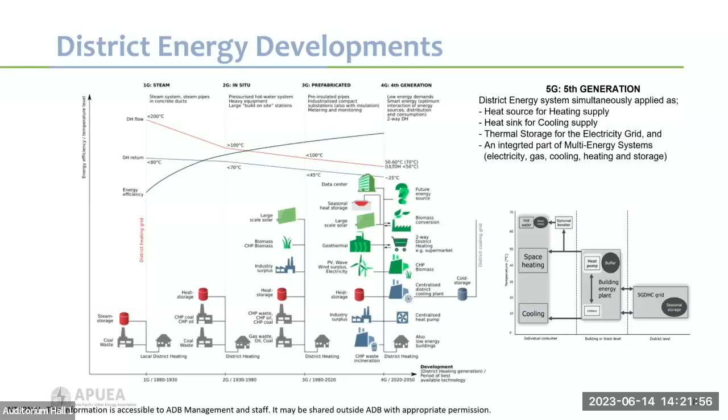We introduced geothermal. We introduced two-way district heating, or basically heat production from, let's say, supermarkets, that can actually sell excess heat to the district heating network. You can see there are many examples there. Also, when you connect district heating with district cooling, basically utilizing heat pumps, the hot and the cold side, for district heating and district cooling at the same time.

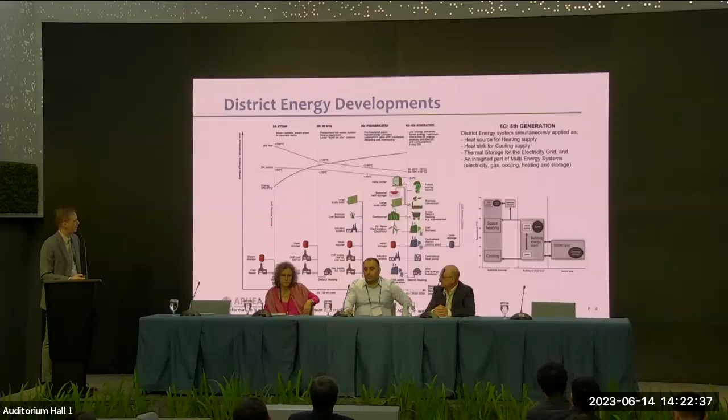So as you can see here, there's been quite a long development and lots of improvement over the years. And as you see in the graph here, the energy efficiency has greatly improved over the years. And also the temperatures for both the primary and secondary side have gone down, slowly and significantly. So that's a short introduction to where we are today.

And for district cooling, you might not be aware, but it has also existed for quite a long time. It started in North America in the 1960s. And in America, both district heating and cooling are utilized a lot in university campuses, hospitals, and these kinds of applications. There are more than 400 district cooling systems in North America.

In Europe, the first district cooling system was introduced in Paris in 1967, supplying cooling and heating to the La Défense commercial district. Today, there are about 150 district cooling systems in Europe. And the first district energy, both cooling and heating, system in Asia Pacific was at the Osaka Expo in Japan in 1970. And there are about 150 district energy systems in operation in Japan today.

And in China, I have an update to this number. I think in China there are actually more than 11,000 district heating systems and 200 district cooling systems today. In Southeast Asia, there are more than 40 district cooling systems in operation. I will show another slide, a bit more graphic.

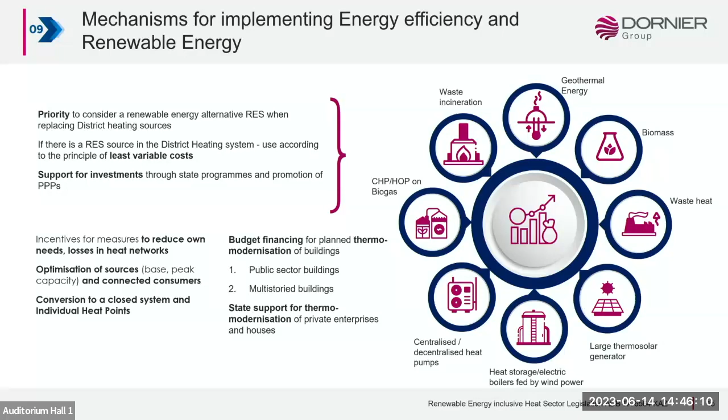And another topic, which I also mentioned already, is finding mechanisms for implementing energy efficiency and renewable energies. And one of the tools for doing that is that each of the regional authorities which got responsibility for heat planning has to do a heat master plan. They will be given 2 years' time to develop that heat master plan, and this master plan should cover at least a 5-year period, ideally a 10-year period, outlining the current status, the problems, how to go forward, what investments will be needed, for which measures these investments will be used, identifying sources of financing.

And so this is the responsibility of the local communities. They will give it to the ministry, and the ministry will give their comments: either they approve it or they give it back to the municipality again. They have to revise it until it is adopted, and then of course the tariffs also need to be approved as part of this master plan, and then it needs to be implemented.

And this is again one topic which was not initially considered in the project, but the ministry requested us to do a pilot master plan just to show the methodology, how to do it, and to give something at hand to the people on the ground, so that they have some guidance how to do it.

Yeah, and that's more or less the end of my presentation, so I could only shed light on a few subjects of this very complex project.

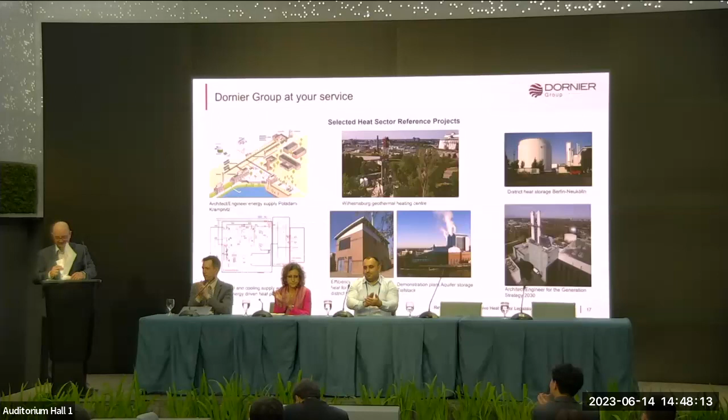Thank you very much, Ronald, for that quick introduction. We can really see the complexity. I mean, it is about the legal framework, the political context, the technical aspects, a quite complex project, which we probably could have a whole workshop just focusing around. Very interesting. Looking forward to the Q&A sessions here also.

Exactly. And you mentioned you already had it there in the project. So yeah, that's really great. It provides quite some thoughts on how to move forward. And I think it's safe to say that localization is quite important. I mean, all countries and markets will be quite different, but at least it gives a good indication on the approach to take anyway, and a lot of experiences to learn from. So thank you very much.

Next up, I would like to introduce Elmar Asgarzadeh, Tech Director of Climasel from Azerbaijan, who will talk about energy efficiency for the energy transition, reducing reliance on conventional cooling systems through innovative technologies. Please take the stand.

Good afternoon, ladies and gentlemen. My name is Elmar. I'm from Azerbaijan, and my background is chemical engineering. I'm new in the innovation sector. I'm a founder of Climasel, a startup company. We are right now changing the future of cooling systems with advanced materials.

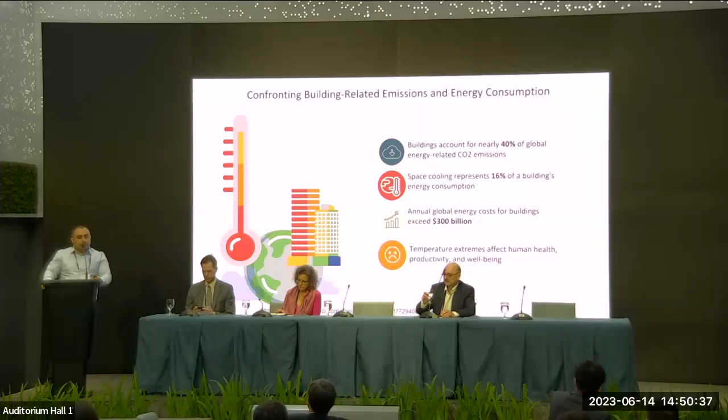In recent years, we have seen encouraging results; lots of investment has been directed towards the decarbonization of buildings. And also each year, lots of countries are joining this trend because they understand that efficient cooling of buildings is very important, and they understand the benefits.

But unfortunately, we have to face reality, because due to the Paris Agreement, we have to reach net zero by 2050. But for now, we are seeing an increasing gap between where we are and where we're supposed to be. That's why we have to solve this problem with hard work and also with efficient solutions.

The need for cooling has been increasing, and in the next years it will increase exponentially, because lots of buildings are being built and the population is increasing. That's why we have to balance this trend. There are lots of technologies in the world to combat the energy problem, I mean the cooling of buildings.

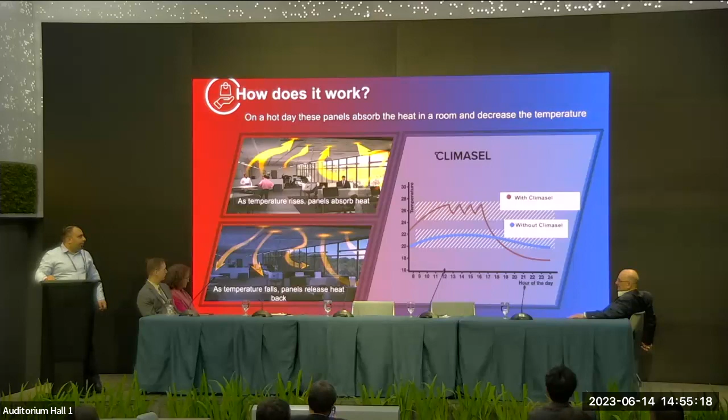Right now, incorporating phase change material into buildings is very popular, but there are lots of challenges. First, as I said, is leakage. The second is biodegradability, because lots of materials are not good for the environment, and also they are not as efficient as they say. But we have used bio-based phase change material, which is derived from different kinds of bio-based sources, and we use a biopolymer to incorporate it with our phase change material.

We use the desired temperature for buildings. The exact temperature changes with the location. For example, for Baku, Azerbaijan, we have designed a 23 degrees Celsius melting point because this is the comfort temperature. But for other places, especially hot climates, for example India, we have to design a higher temperature together with an active cooling system.

With the value proposition, you can ask whether this material should be very costly. Yes, its price is higher than conventional. Can we go back? Okay. The material cost is higher than conventional panels, but there are advantages. After using these panels for 2.5 years, you get payback from the reduced energy cost, and after that you get annual profit by using the panels.

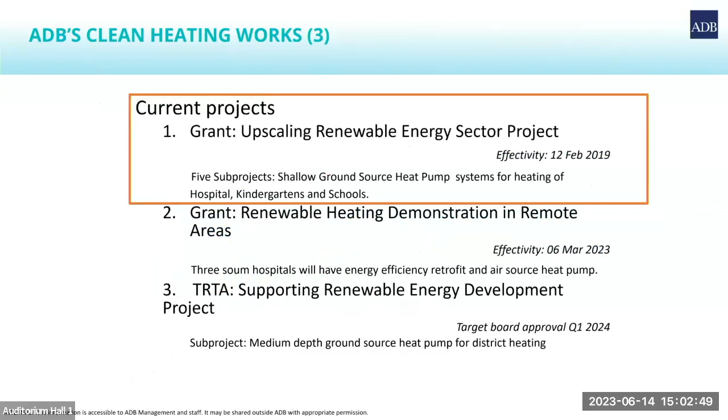So under these 3 projects, this slide aims to give a brief insight on what we are doing and what projects we are funding. In case of scale of focus, the projects are focusing on individual buildings as well as clusters of buildings or district heating. Currently implemented projects are on individual building sites, and we are trying to shift to district heating.

In terms of the technologies used, those 3 projects used shallow ground source heat pump, open and closed loop, and solar thermal collectors for heating and hot water, or injecting the excess energy into the ground during summer, aiming to support the shallow ground source heat pump during heating seasons.

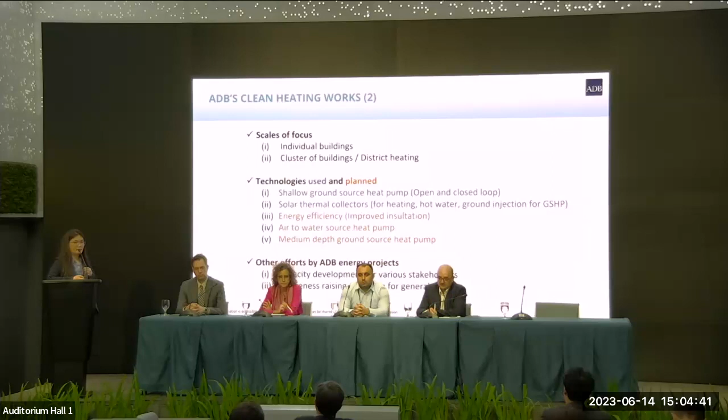The names of the 3 projects are listed here. The first one is the Upscale Renewable Energy Sector Project, under which we have almost 12 sub-projects. 5 of them are focused on clean heating, using shallow ground source heat pump combined with solar thermal. This project became effective in 2019, and aimed at providing clean heating for hospitals, kindergartens, and schools to maximize the benefit of the project.

The second one just became effective recently this year, with implementation starting in March. The name is Renewable Heating Demonstration in Remote Areas. Under this project, some hospitals will be energy efficiently retrofitted, and air source heat pump will be providing energy.

The third one is actually transaction technical assistance. The project name is Supporting Renewable Energy Development. The target approval for this project by board approval is next year Q1. Under this, we have a medium depth ground source heat pump sub-project for district heating.

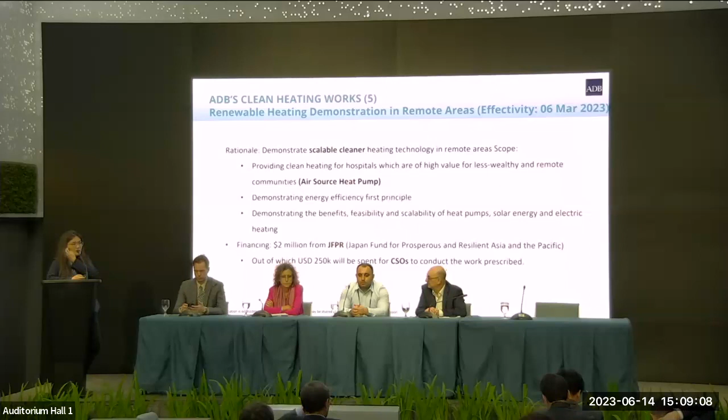Last but not least, this project, the Transaction Technical Assistance Project, is Supporting Renewable Energy Development. Under which, as I mentioned before, there is a sub-project for district heating of Kharkhorin city. The technology to be used is medium depth ground source heat pump. Differently than the shallow ground source heat pump, we have to drill up to 2 or 3 kilometers into the ground, so this technology is not site specific and can be implemented anywhere.

So it has great potential for replication or scaling up in the future. This project will be the first in Mongolia, if it successfully gets approval from the board and is implemented.

This table is showing the comparison between the medium depth ground source heat pump and shallow ground source heat pump in terms of cost implications. For shallow ground source heat pump, to have the equal capacity of system, we have to have like 440 wells drilled. But with the medium depth ground source heat pump, it's only 4 wells, so not so much land is needed. Drilling cost per meter is much higher for the medium depth one, but because the total drilling length is significantly less than the shallow ground source heat pump, we end up having much lower cost for drilling.

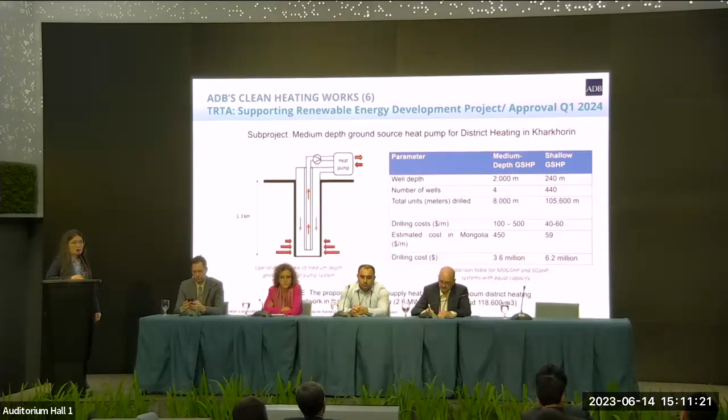So with this technology, we are trying to shift from focusing on individual building heatings to district heating. That's the end of my presentation. Thank you so much.

Thank you very much, Tuija. It's great to see the work that you're doing in Mongolia also, even though the conditions are similar to Kazakhstan, but also there are quite some differences. It's great to see that you're developing district heating solutions also in the remote areas, which I know is meant to be replicated. It's really great to see that you have found the technologies that are feasible to be replicated.

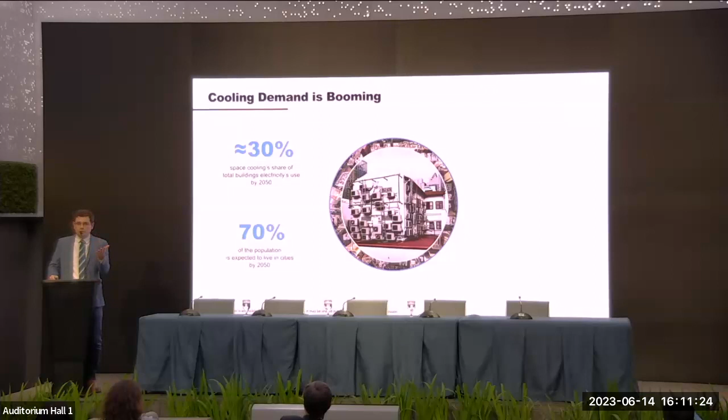70% of the population is expected to live in cities by 2050. Today we are around 55% of people living in urban areas. So by 2050, there will be about 2 billion more people living in urban areas where district heating and cooling makes sense, so there are real opportunities coming for these technologies.

The energy requirements for cooling demand will grow by 300% by 2050. The baseline is not today, it's more like 2016-2017, but still the jump is huge, and this is global. For the Asian region and Latin America, we are expecting for the same cooling demand a jump of 625%. So we are talking about a topic that has to be properly managed in the coming years and decades if we don't want its impact on sustainability and climate change to follow the same trend.

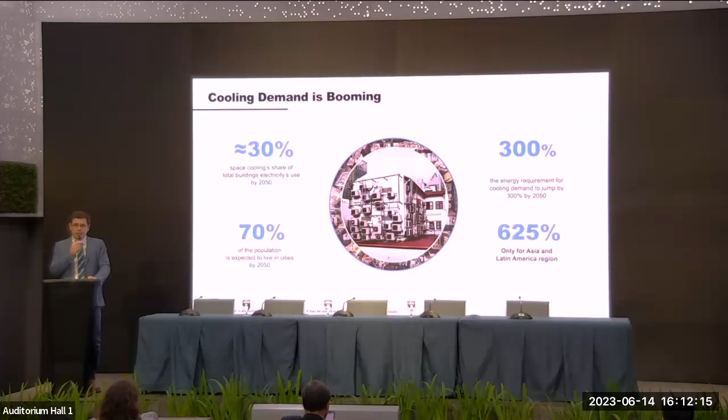So why district cooling? The common benefits of district cooling, I'm sure you are aware of those, but I found these numbers always impressive, so I like to show them.

We could expect 50% improvement on energy efficiency versus standalone. I'm not saying every project is the same, but I had to choose one number, so kind of an average. We can also expect 50% reduction on carbon emissions, 80% reduction on chemicals, and actually 65% less water consumption versus standalone. For these last two, it's really related to lower use of water and chemicals, as we move more and more into non-chemical type of water treatment. Those are common benefits from district cooling.

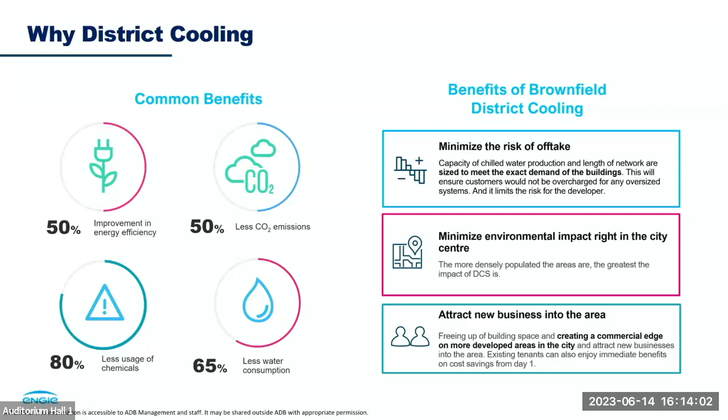Now I want to discuss a bit about the benefit of brownfield district cooling, which we don't talk about a lot. This is basically development of district cooling in a brownfield area, where you already have existing buildings. We often think about district cooling and heating for new real estate and industrial developments, but actually the real opportunity, at least in the short term, is on existing buildings. If we compare the portfolio of existing area versus the coming new area in the next 10 years, there's much more existing area where we can have an impact by implementing these kinds of technologies.

So some benefits of developing these technologies in brownfield areas: we minimize the risk of offtake, which is very important for both parties, the clients and the developer. We size the system properly, so we don't overestimate the cost for the client. And on our side, we limit the risk of future real estate development that isn't always under control, especially when you have a crisis like we just experienced a couple of years ago.

Another benefit of brownfield district cooling is the environmental impact, because existing areas are generally densely populated and in the center of cities. New developments may also be in city centers, but in general they tend to be a bit more spread out. So focusing on existing areas, we would usually focus on city centers where there are a lot of people, and the denser the area is, the greater the impact district cooling has.

Similarly, having district cooling and district heating developed in existing areas will bring a new sustainability impact to that area, which can attract businesses, especially tenants now looking for offices. Some of them are really looking at the sustainability impact of their business, including the offices they are in, and would consider an office that is more environmentally friendly than others.

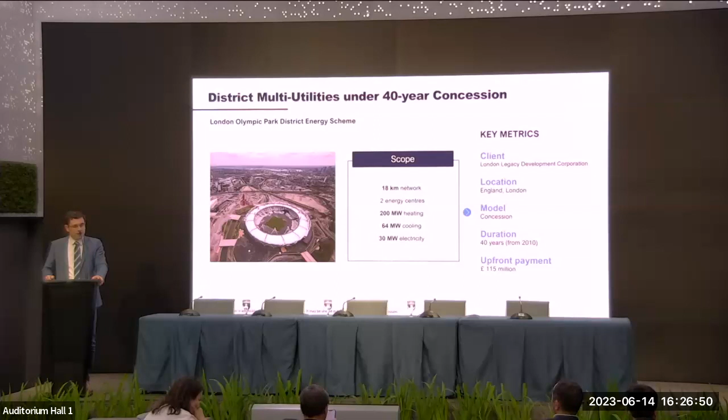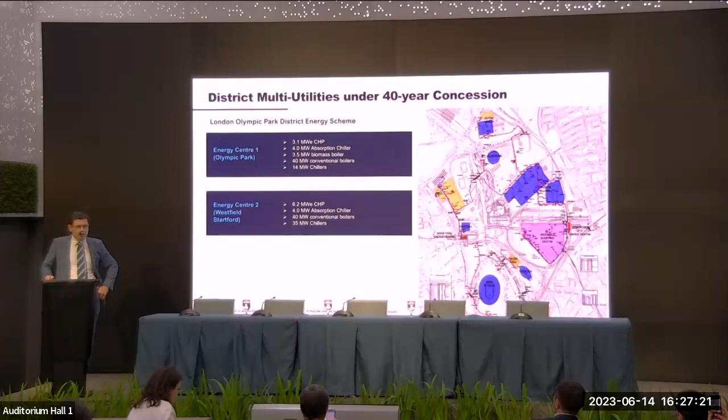Two energy centers that are using interesting technology that we would not really be able to use in real estate development in Asia, but for sure for industrial estates, it could make sense at least in Southeast Asia. So absorption chillers, some biomass boiler, conventional boilers and chillers. And then there is the distribution part of 16 kilometers that is connecting all the buildings.

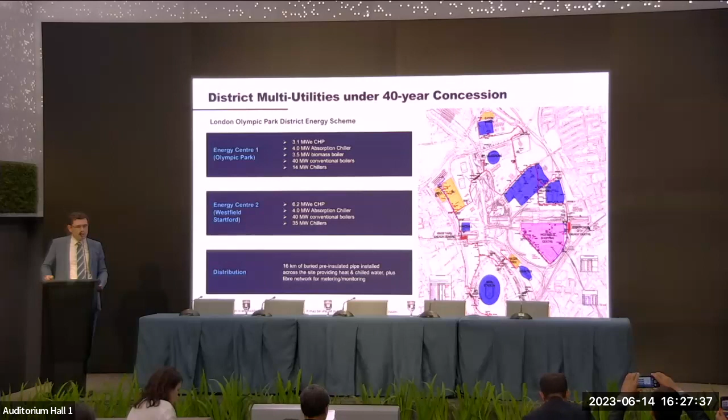And last but not least, I finish by this one. Usually we keep the best for the last. So this is a 50-year concession that we secured a couple of years ago in 2017. But it's still a key reference for ENGIE. So in my mind, I feel that it's only a couple of years ago. So we have acquired the existing energy system, utility system of Ohio State University, which is supplying energy to 485 buildings. It's one of the biggest universities in the States.

With a key target to reduce the energy consumption by 25% after 10 years of development, so by 2028. The upfront payment for this acquisition and some investment to meet our target is around 1.2 billion US in a partnership between ENGIE and Axium.

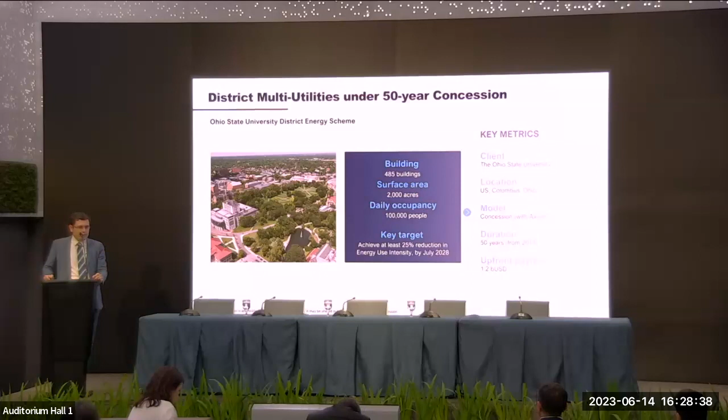And the beauty of this kind of partnership with universities is that we are in an environment a bit like Punggol Digital District in Singapore, where there is a lot of brain, there is a lot of innovation, there is a lot of research. So we created a center of expertise there, and it's really, from what I heard, because I've never been there, a real success story between the professor, teachers, and ENGIE as the operator.

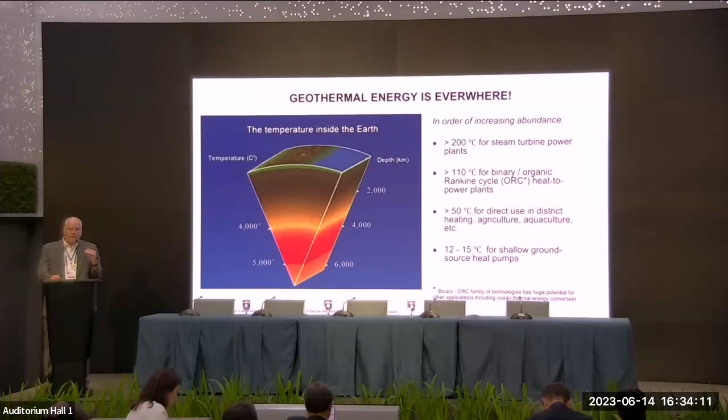Okay, but geothermal is everywhere, right? We have to remember that we still have lower grade resources that can be utilized, but we're not going to build a project around a power purchase agreement for most of that resource. So it's counterintuitive maybe, but as you go down the list there, the lower the temperature, the bigger the resource. And I think that'll be clear here pretty quick.

Okay, so one of the things that we looked at and talked about in Kazakhstan a couple years ago was this idea of how to develop geothermal energy. Well, we're not going to do steam turbines. We don't have that high temperature resource, but in the oil and gas fields, we know some of the oil and gas fields are pretty hot. So like bottom hole temperatures of 100, 120 degrees centigrade.

Now we can convert that heat into electricity using binary generation technology, organic Rankine cycle kit, and I'll explain that in a second. And then depending on our location, we were looking at Aktau or Atyrau. I can't remember which place, but the city, the urban area is almost on top of the oil and gas production. So conceivably we can do power generation at this 110 degrees centigrade range, and then we can take the residual from the ORCs and use that for district heating.

And then we still have heat energy to use for other space heating, which we could use for greenhouse agriculture and fish farming. Now, then the lower temperature, the 12 to 15 degrees C, that would be separate. Okay, but we could get 3 revenue streams in a cascade if we have the end uses co-located or located close enough together. So I think it's very important to think about this just in general.

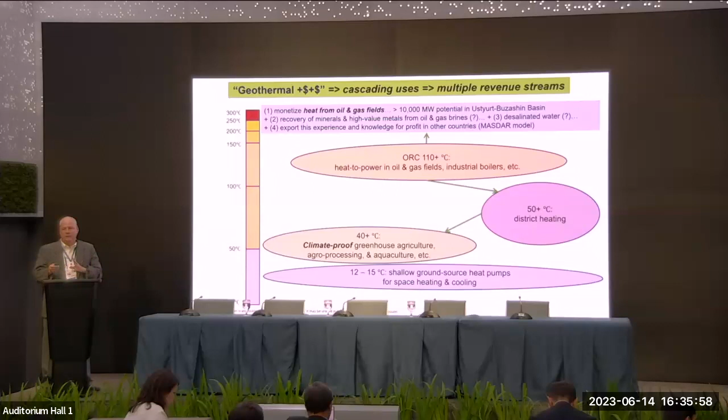We combine different types of renewables. We take one resource, geothermal resource, we can use it for more than one thing, but we really have to think about it. We have to want to do that.

So quickly on ORC, this is a binary closed loop system where you've got a turbine generator that has a working fluid with a boiling point lower than the boiling point of water. And these are designed really to mate to diesel gen sets, but you can use them for heat to power on industrial boilers, biomass power plants, ships.

You can couple these to marine diesels, and they look expensive on $1 per watt CapEx basis, but the levelized cost of energy, if you just take the generation output and divide it into the capital cost, we're looking at undiscounted levelized cost, so like 4, 5, 6 cents per kilowatt hour. It's not expensive at all, but you have to look for this and see the opportunity. And this is really a no-brainer where you've got diesel gensets running all the time.

And why should we care about ORC? Well, one reason is that if we scale it up onshore, ORC technology is the same thing that's used for offshore ocean thermal energy conversion. So it's modular, we can drive down the cost through manufacturing economy of scale, and there's a synergistic development virtuous cycle that can be created between using ORCs onshore and eventually offshore.

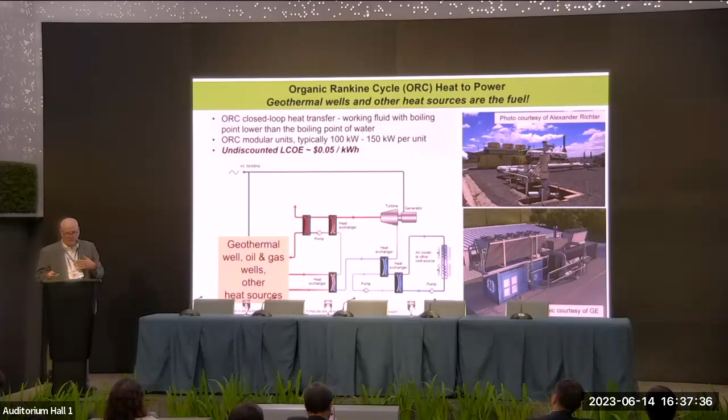Now, geothermal district heating is actually pretty straightforward from a technology perspective. The geothermal wells are our fuel, which is prepaid, and the technologies that we need are pumps, heat exchangers, heat pumps. It's really not very complicated.

Quoting Ted Turner out of context, even somebody from Cleveland, Ohio could figure that out. Not Columbus, Cleveland. Columbus is where the Ohio State University is.

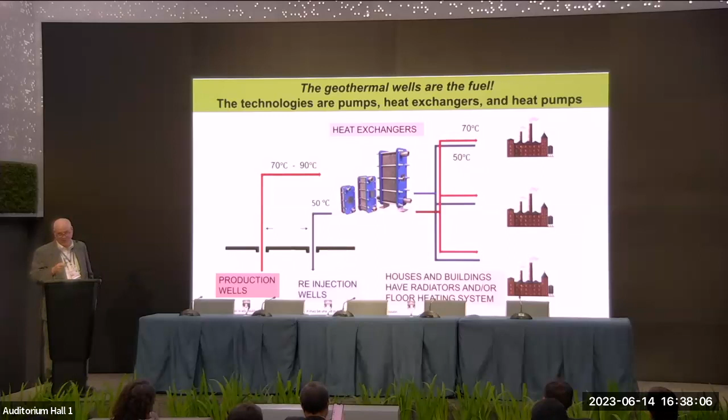For district heating in Zharkent and Almaty region, it looks like we're going to have to go down to about 2.5 to 3 kilometers. And by way of comparison, the geothermal heating projects that I worked on in China, we were only having to go down to about 1.5 to 2 kilometers, and we're getting 50 to 60 degrees centigrade water. So the space heating that can be covered is proportional to the flow rate at that temperature.

So we still have that shallow geothermal, and again, based on the experience in China, and Byamba talked about this in Mongolia too, we have a pretty good idea of what the depth range is that's going to be economically viable. So generally in China, where the shallow geothermal has been done, maximum depth 200 to 300 meters to get to that 12 to 15 degrees centigrade range.

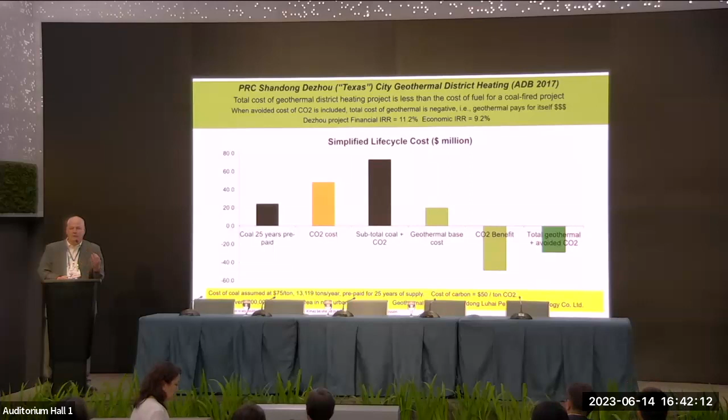Now, so in this case, we don't have to monetize the CO2 to justify doing the project. But if we don't do this analysis, we're not being honest about the evaluation of the options. I'll come back to this again to try to drive home the point.

Now, one of the things I think ADB hasn't really done so much of, and Byamba talked in more detail about this, but we can do shallow ground source heat pumps, and again, we've got to find that 12 to 15 degrees centigrade. So this is pretty common now in the Beijing urban area. So in the winter, you've got like -20°C, and in the summer, you've got up in the high 30s centigrade. So you can do this. You can either build it in, or you can retrofit buildings, and you get heating in the winter and you get cooling in the summer.

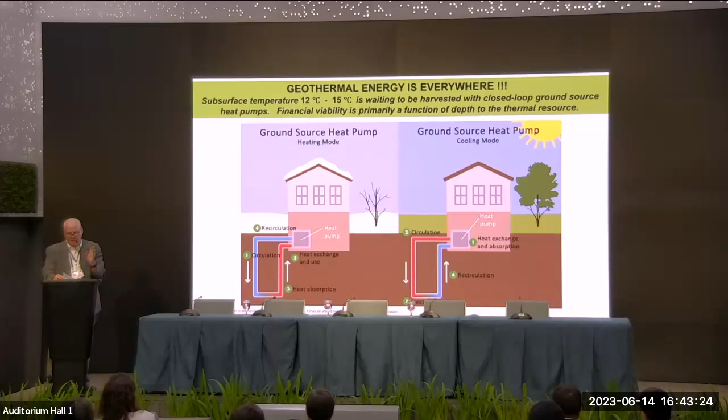And in hot climates, like in the Philippines or Indonesia or some other places, you can get year-round cooling with this. And this is really one of the most scalable things. And this is the resource that's really available everywhere. It's just that we've got to be able to find that 12 to 15 degrees centigrade within maybe, say, 200 to 300 meters maximum depth.

Now we've got geothermal, we've got the geothermal resource, but what are we running the pumps and the heat exchangers and the heat pumps on? If we're running it on the grid, then we're not really at zero emissions yet. But if we bring renewable energy to our site and run all of our pumps and heat exchangers and heat pumps, if we run everything on renewable energy, then we can say with a straight face, without any accounting legerdemain, that we actually have a 100% renewable heating or cooling solution.

So we can look at doing PV on roofs or ground-mounted PV in residential areas. We can add, if we need to add storage, if we're trying to bring solar and wind, variable renewable energy, on a specific site, maybe we need storage to help smooth out the electricity that's there. Maybe we add thermal storage.

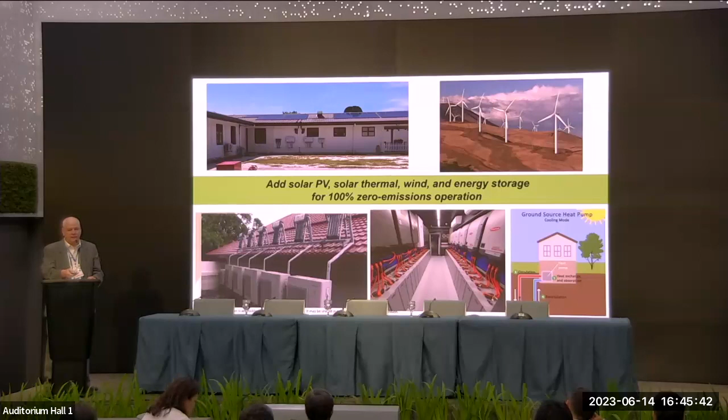Michael had also, in our exchange of notes and discussion, talked about what you might be able to do with wastewater treatment plants, and this is pretty far out of my knowledge, to be honest. But there are ways and some kits available to try and do. We could either do retrofit or new build with different hardware, depending on what we're trying to do. Obviously, if you build it in, usually it's easier to build in. If not, you may be able to retrofit.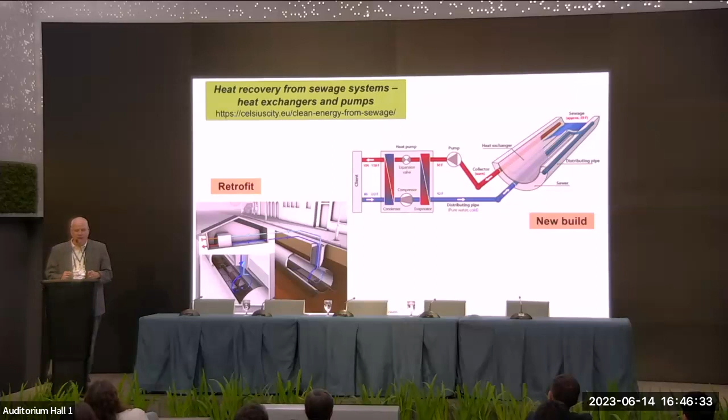Again, it's heat exchangers and pumps. The technology is not really that complicated. It's not rocket science. So what I want to close with here is going back to our theme of ASAP this year about getting to net zero and energy transition, right? At a national level, especially, countries need to think about their energy resources and their energy wealth.

And I've put some numbers together for Kazakhstan on the coal, oil, and natural gas production. So we drill holes in the ground and we extract the money from those holes. So how much money is that? Okay, it looks like a lot, right? And we're not thinking about renewables as a way to make money. We look at this extractive and, oh yeah, we're a rich country. Well, some people are rich, I guess, I don't know, in Kazakhstan.

But if we actually factor in a cost of carbon now, in Kazakhstan's case, almost all of these emissions are being exported, but that's scope 3 emissions, right? So in the UNFCCC dialogue, though, Kazakhstan says, well, hey, our emissions are like nothing. We're like number 41 in the global rank in terms of national greenhouse gas emissions. Well, okay, that's true, except that you're exporting those emissions. So we have a fundamental accounting problem here.

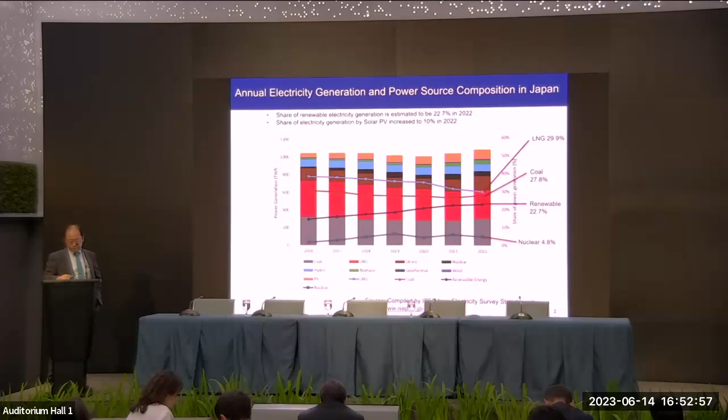So about the market of district heating and other energy business in Japan. This heat market is very small in comparison with the gas and electricity markets. This is because historically there has been an absence of heat policy in Japan, and heating has been of less importance in Japan's electricity policy. As a result, oil, gas, and electricity industries have been dominant in Japan's heat market and compete with each other, which resulted in excluding renewable heat historically.

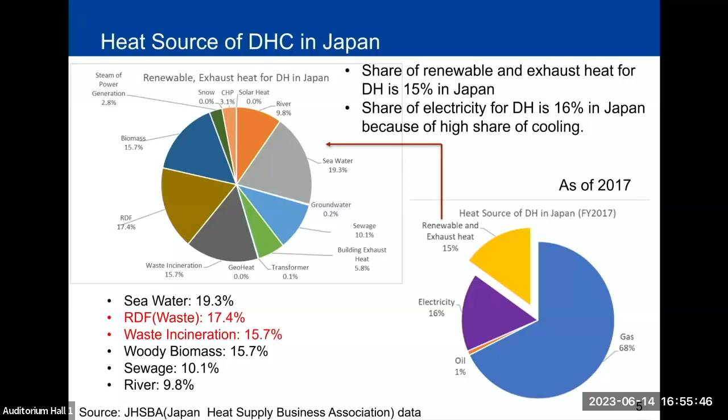But the main source of heating is gas - liquefied natural gas from abroad.

This graph shows the heat of municipal waste incineration plants in Japan. Heat from municipal waste incineration plants is utilized mainly for internal facilities and hot water, such as spas and swimming pools near the plants. As of 2016, the total number of plants is over 1,000 in Japan.

55% of plants create heat from waste incineration, and they also create power - over 300 plants create power from waste. But it's not connected to district heating. Very few plants are connected to the district heating network, only in the Tokyo area.

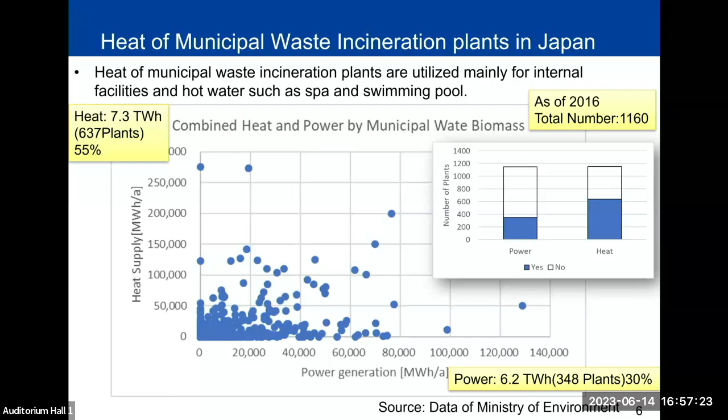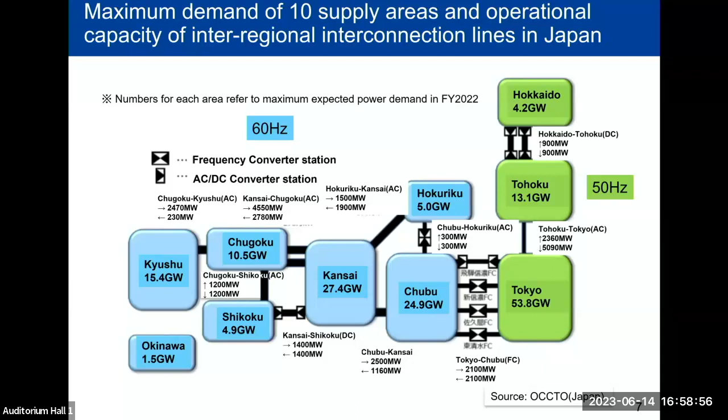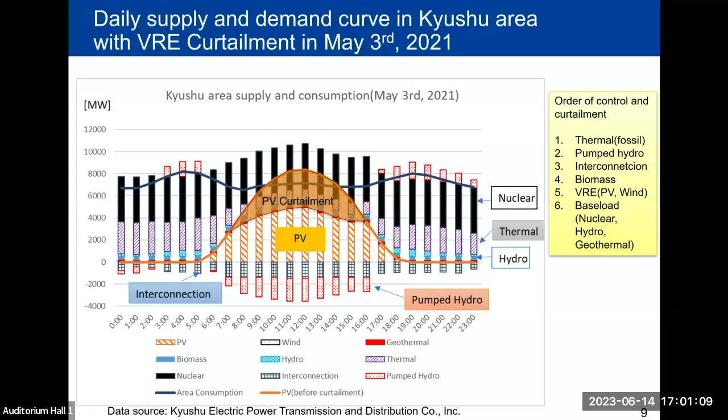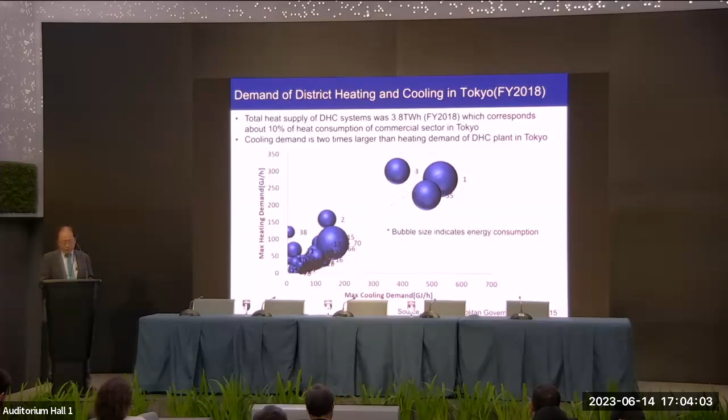So this graph shows the share of renewable and unused energy of this heating and cooling in Tokyo. So unused energy means some waste heat and river heat, geothermal heat, and groundwater heat. But the average is 5%, not so high. It's very low because they basically use gas for the energy sources. So the right side plants use electricity heat pumps for such unused energy sources, and also some waste incineration exhaust heat.

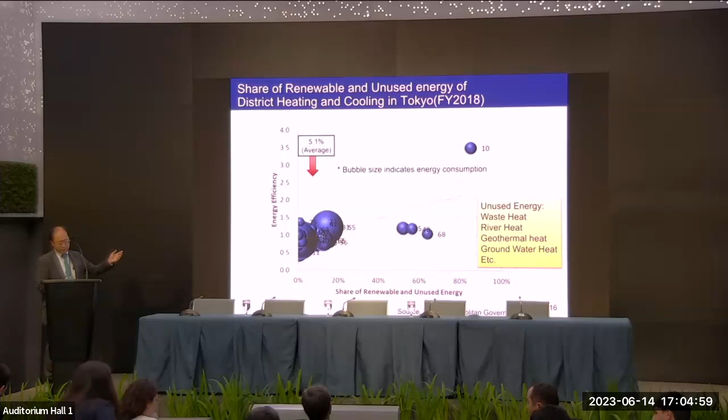So this is one of the plans, the case of the decarbonization leading area plans. This is a rural area, Ogata village, located in the Tohoku area, in the northern area of Japan. So this is a very compact city, and also some rice area.

In the center area of the village, they installed solar PV and storage batteries of sufficient capacity in public facilities, commercial facilities, prefectural university, village housing, and residential housing. And hotels, which are large users of electricity, will be supplied with electricity from large-scale solar PV using their private lines. In addition, the village will utilize adjacent village-owned land to build a new large-scale solar photovoltaic plant and big storage batteries, which will be connected to the power grid.

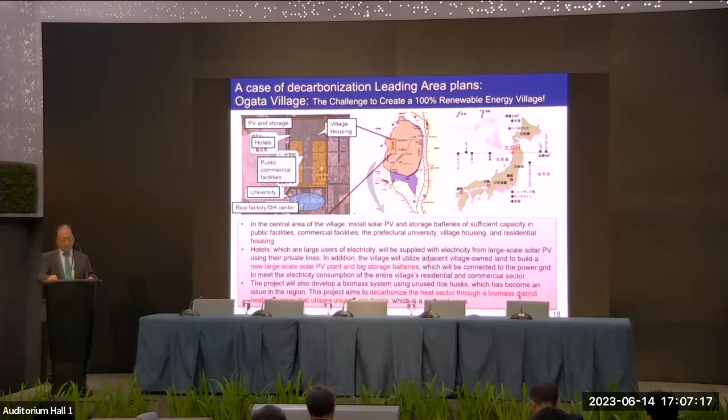Thank you very much, Dr. Hironao, for that introduction to Japan's energy sector in general, but also district heating and cooling. I think we can see that in Japan, district energy is often DHCS, district heating and cooling systems combined, where cooling seems to be the driver of the development of these systems.